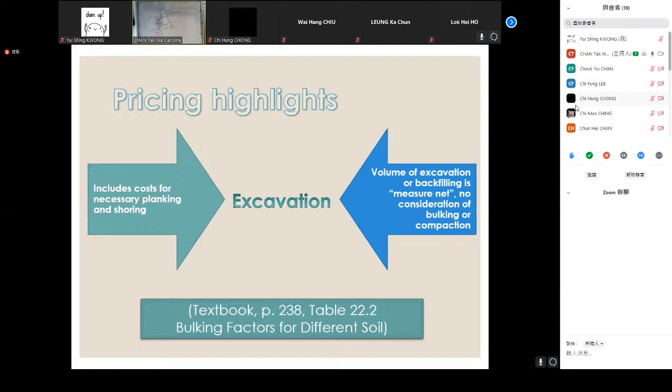And if I have a hole on the drawing which is 1 meter cube, and I need soil to fill this hole, I need more than 1 meter cube of soil, because after putting it into the hole, the soil has to be compacted to make sure it is perfectly filled. So of these two situations, this one is the bulking, this one is the compaction. The two are interrelated, quite similar because of the same concept.

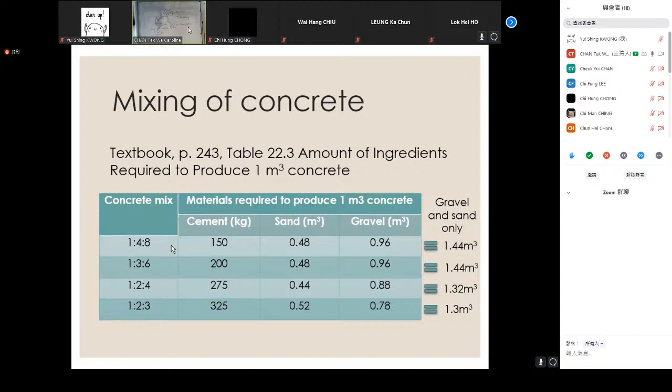Besides the shrinkage concern, we also need to allow some wastage for spillage, or extra wastage in case you have some odd sizes, or very difficult methods to place the concrete. Again, this relies on different projects and different designs, and you can see that we have a pretty wide range.

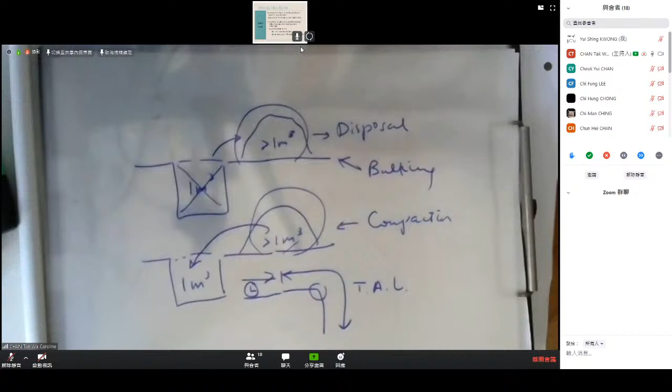And the next one is brickwork. Of course, we need to know very well the type of bricks to be used and also the bonding, the pattern, because the pattern of the brickwork can have an implication on the bricks requirement.

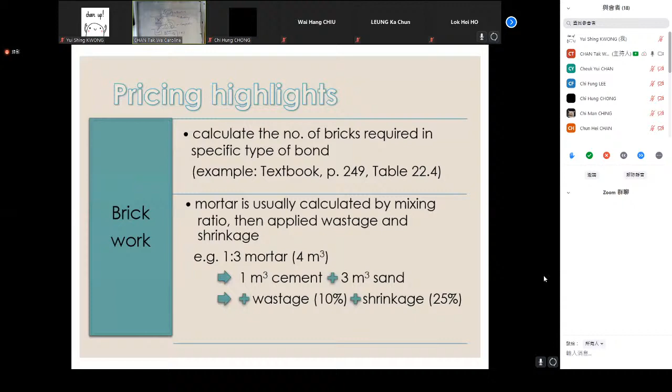Lastly will be the steel and metalwork, woodwork. The two are very similar, unless you are talking about structural components. But if you look at the non-structural items like the furniture, the doors, all these, of course what you need is just to look at the

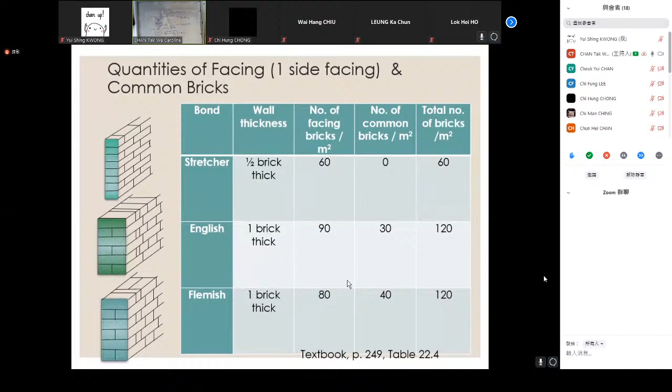For plastering and painting works, plastering, of course, we have to be careful about the shrinkage, just like the cement and mortar we apply in the brickwork, because in plastering work the major materials that you require will be the cement and mortar. So when we price the ingredients, we need to allow sufficient shrinkage together with the wastage.

And for the painting works, again, the only concern is usually the number of coatings that you need to apply for the specific area, because in the painting works, we only measure the net area required for painting. Say for instance, if you have a wall of 1 meter square to receive emulsion paint, we will measure 1 meter square in the BQ.

But in fact, this 1 meter square is not just painted once. Usually, it will be painted several times. I will assume, for example, 3 coats. It will have primer, the undercoat, and the finishing coat. How many coats is stated in the item description only. But when we measure, we are not measuring 3 meters square. We are measuring 1 meter square. So in other words, we need to price all the layers in our unit rate, and make sure that every single layer has been priced.

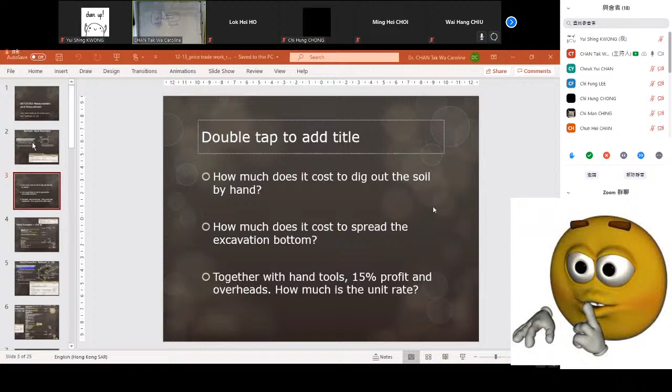Lastly, together with the hand tools, we have a small cost for the hand tools, to find out the total unit rate, assuming that 15% profit and overhead will be allowed.

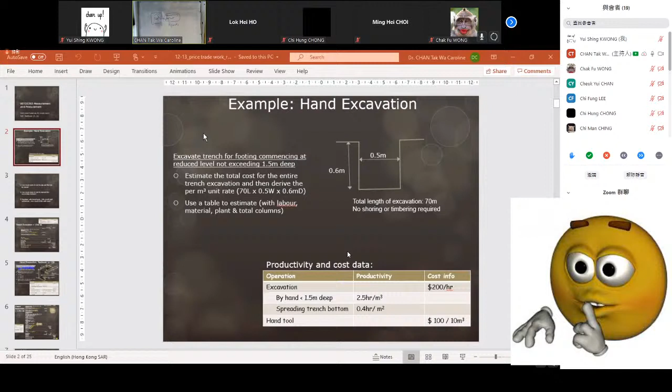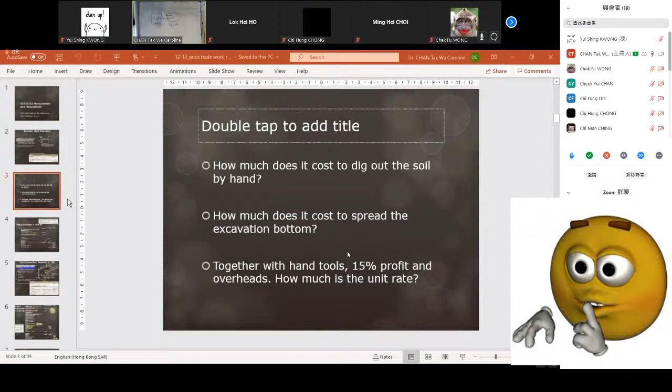And to make sure that when you do the calculations, you know what you are calculating, and be careful about the units of individual items.

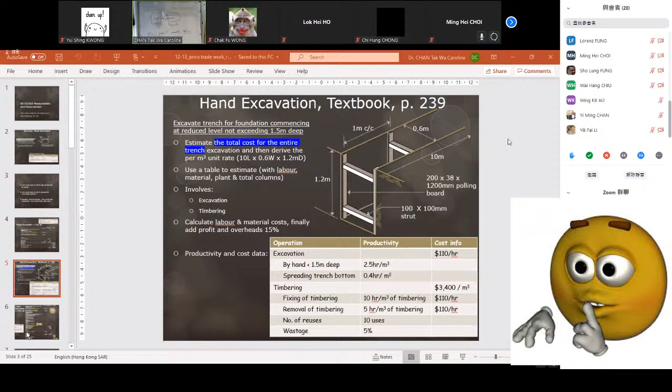I don't require any special contingencies to be applied, so at the end will be to sum up all the required ingredient costs.

So to start with, we calculate the total volume of the excavation, which is 7.2 meter cube. This is simple - the whole trench is 10 meters long, with cross-sectional size 1.2 by 0.6, so we multiply them all. Then for digging, it's 2.5

hours per meter cube. We multiply by the volume and also the labour cost per hour, so we can get the total labour cost for excavation. Then for spreading, we use the meter square - the base area, length times width, times the man hour required times the labour rate gives us the labour cost for spreading.

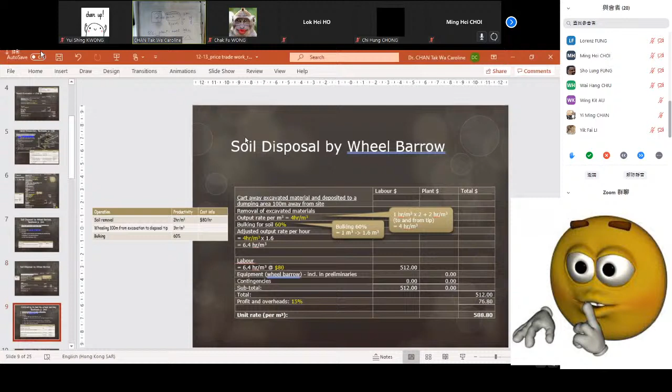...using the unit rate at the start, you can calculate quickly. Now let's look at another example: if we do concreting this time, of course concreting has different methods. In the BQ it only states reinforced concrete in beds, meaning slabs - usually the ground slab type - in beds at 250 millimeter thick.

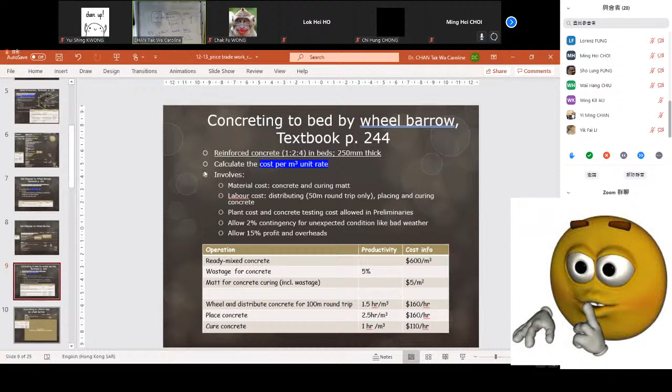So we calculate it for the whole item. Using the unit rate approach means we don't need to calculate the total volume. So for one meter cube it's calculated like this, and of course we need to add the...

wastage of 5%. So this is $30. Next will be the curing mat cost.

Here I want to ask the students, how much does it require for the mat, for 1 meter cube of concrete?

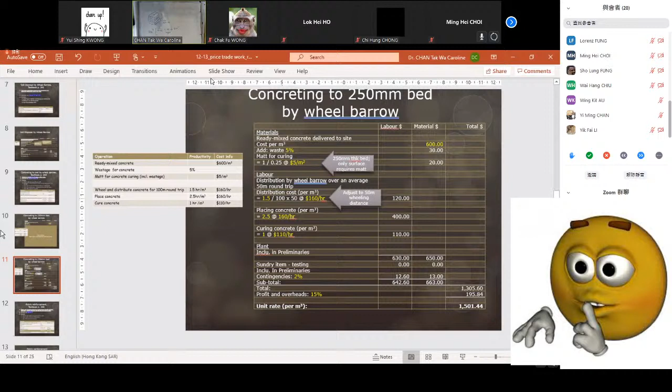And then, oh yes, why the 100 meter distance round trip - so half of the hour would be required, so this is a discounting factor, meaning it's divided by 100 times 50, meaning half, then multiplied by the hourly rate of the labor would be the cost required to distribute the concrete.

And then to place concrete, we simply multiply 2.5 hours by $160, and curing is similar.

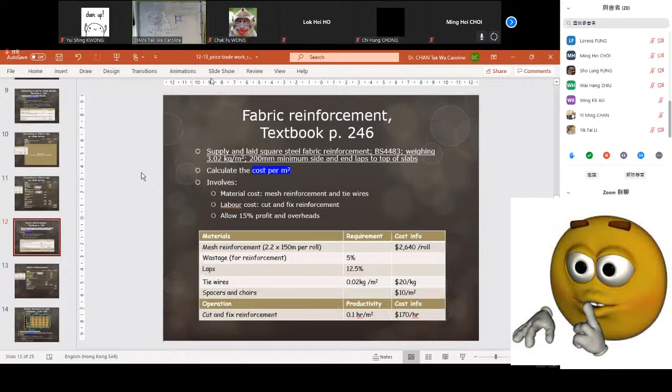We need to check out the per meter square cost. So the roll cost is $2,640, so we need to divide it by the area of the roll. This is the area, 2.2 times 150, so that gives the total area per roll. So we divide this amount based on the cost per roll.

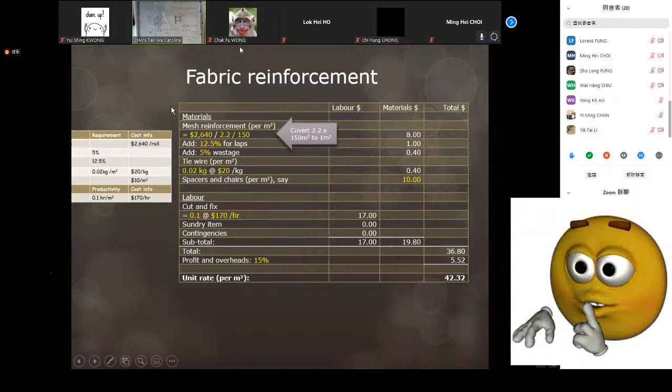So any questions so far? That's the end of today's Zoom session. The above are the intended parts that I want to introduce.

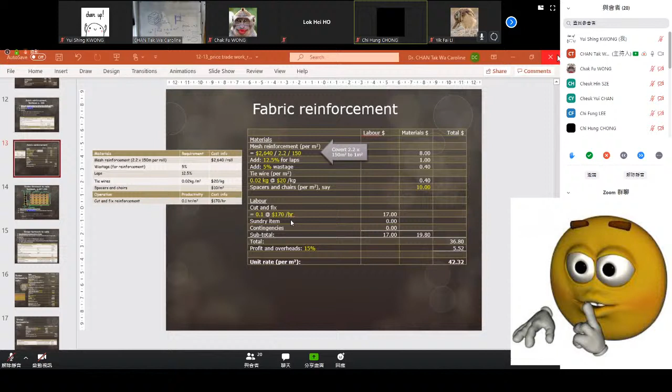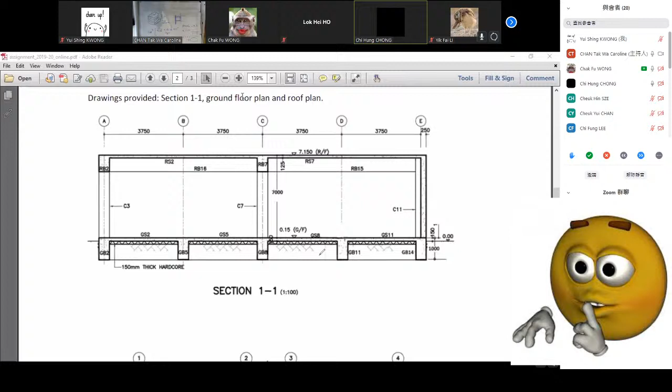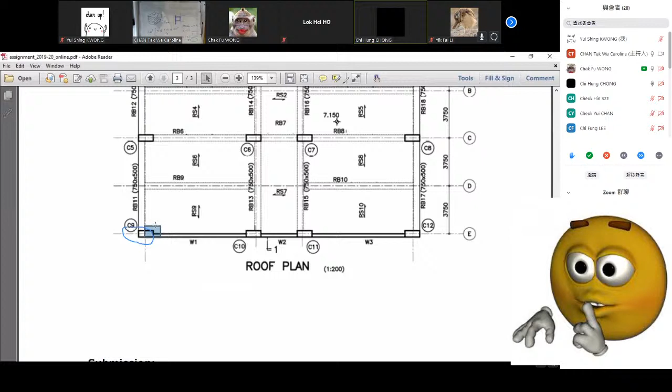係咪？聽唔到啦，我又聽唔到啦。 而家聽到。 你而家聽到邊一句啊？聽到我講嗱，我而家開始講 講緊㗎。 未聽到。 因為我覺得你好似聽唔到我講嘢啊。 依家聽到啦 Zoom 啊，淨老土添啦，又要泄露啲人嗰啲嘢，又原來係俾人哋可以 download 得到，直情唔想用添啊！真係人哋新加坡又可以 ban 咗唔用，我哋又唔得，哎呀死啦啊！好嘢，熄咗啦嗰個record， 但可能熄咗個 record 佢都可以鋪起嘅喎，因為其實佢本身係有個 record 喺度㗎，即係不過我冇所謂喺自己嗰度錄影。

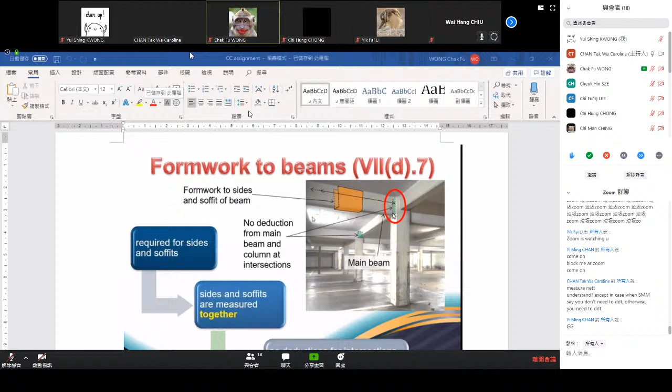明白，聽到嘅，聽到嘅。而家應該我有啲問題問完㗎啦。 係啊，我淨係聽到你呢句咋。 唔係啊，就係問呢兩條問題啫嘛，冇啦。 我都唔知你邊兩條問題。 就係啱啱嗰條同埋 Sophie 嗰條咯。 哦，唔係我次次想講咧，你次次都聽唔到啊！你而家聽唔聽到啊？ 我好清楚啊，而家我咪唔應該講埋啲咁嘅嘢啊！佢又出唔到聲啊！ 要咗你㗎啦，阿富。 唔可以讚 Zoom 嘅。都係打。好啦，係啊，就咁多啦，咩事？ 是但啦。